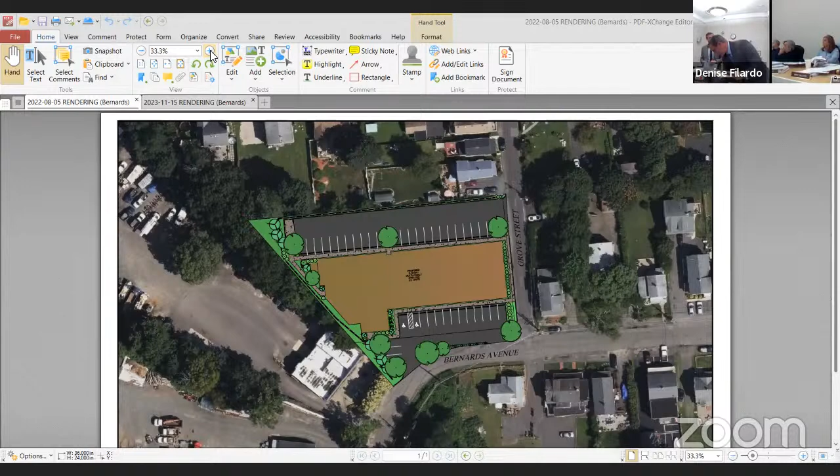There were some completeness waivers that were requested previously and granted by the board as part of the last application, and requested again as part of this application. The board planner's letter identifies nine checklist items that require waivers for completeness, mainly improvements beyond the current property line, such as grading, topography, and other improvements 300 or 500 feet beyond the property. We would agree to comply with those and provide final compliance plans. These are the same waivers granted during preliminary, and I don't believe waiving these items would impair the board's ability to review the application. We'll take that as the first stipulation; you'll see final compliance.

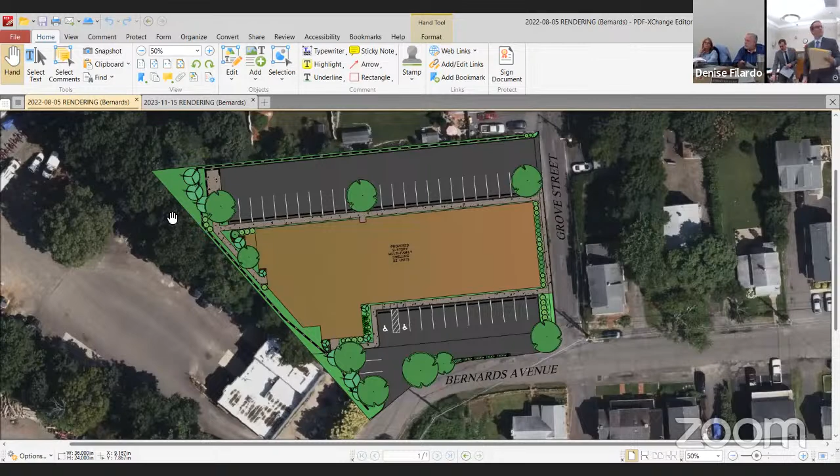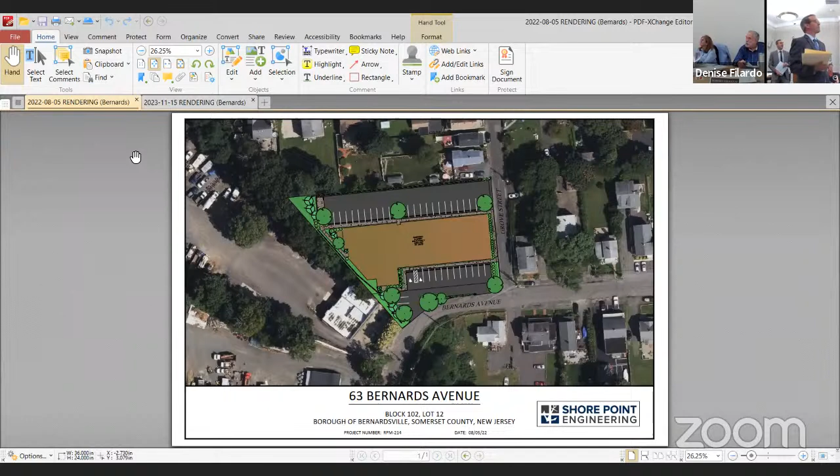Using Exhibit A1, the prior rendering of the site, let's orient the board on the location and surrounding area. The property is located at the northwest corner of Bernards Avenue, with Grove Street on plan going vertically in the northwest corner. It's approximately 0.82 acres and is presently developed with a 2-story multifamily residential structure, a detached parking garage, and a paved area. As mentioned, the applicant is proposing to construct 22, 100% affordable housing units here within a 2-story building.

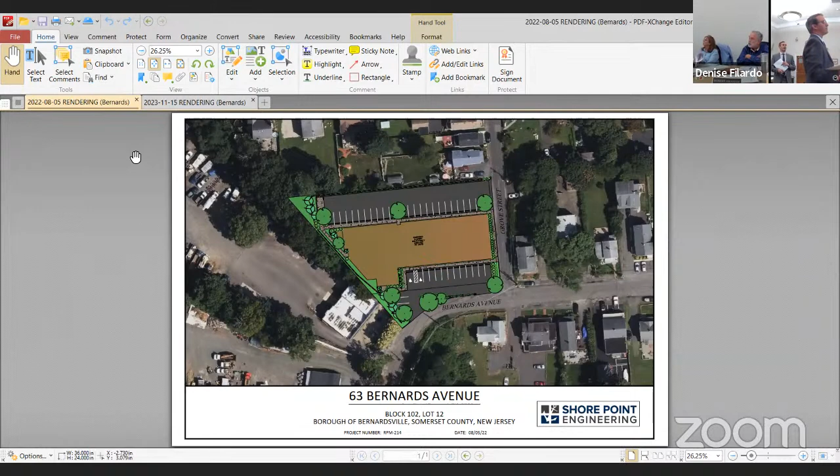During the preliminary hearing, we talked about some challenges on the property, particularly that there's a borough plan to realign and reconstruct Bernards Avenue along the bend here, which was not previously known to us when we did the design. The previous application showed a portion of the parking coming off Bernards Avenue with the remainder behind the building. Our testimony at the preliminary hearing was that we'd modify the plan to adjust the building's geometry, slide it towards Bernards Avenue, and relocate all parking behind the building with a single entrance off Grove Street.

I'm going to switch to exhibit A2 now, which zooms in on the proposed site conditions. I believe we've accomplished everything we told the board we would do at the preliminary hearing. The building has been slightly modified in geometry, but overall it's still a very similar size, with a minor reduction in floor plan square footage. The building was shifted towards Bernards Avenue, and all the parking is now located on a double-sided drive aisle behind the building.

Is that whole parking area kind of pitched downward? The site existing grades from the intersection of Bernards Avenue and Grove Street towards the back corner. In order to provide handicap accessibility to the building and units, the parking lot is essentially flattened in this area, which results in the need for a retaining wall along the northern property line and down the western and southwestern property lines, as discussed during the preliminary hearing.

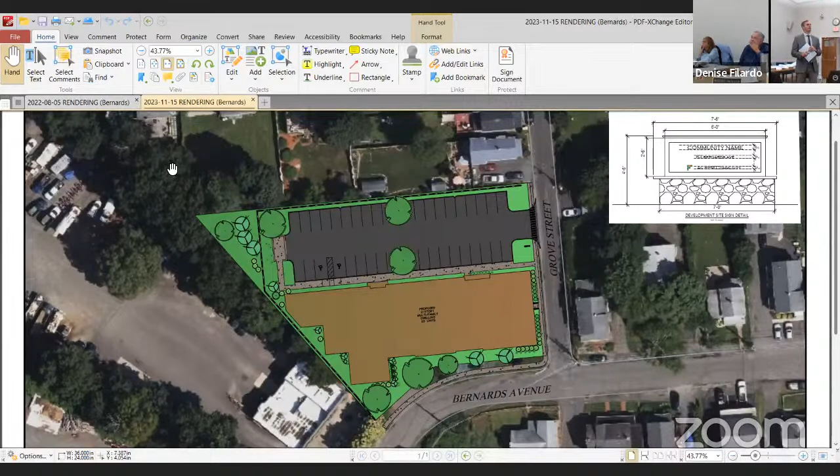The retaining wall along the northern side is about 10 feet in height, and along the westerly property line it's up to 15 feet at the highest point. The retaining wall is located there to create a flat site in order to construct an apartment building that is handicap accessible for all the units.

The retaining wall on the north side of the property, which the parking abuts, will have a guide rail for vehicle protection, as well as a safety fence atop for fall protection. It was originally envisioned as a 4-foot aluminum fence, but due to the location and only about 5 feet between the curb line and the property with a retaining wall, guide rail, and fence, we'd propose a solid 4-foot vinyl privacy fence. This will help shield any headlights from vehicles parking and facing the adjacent properties from headlight infringement.

Mr. Shelley: We're showing green along the back there. The plan is showing landscaping. We have about a 3-foot gap between the top of the wall and the back of the curb, which will have a guide rail with bumpers on it. There's not significant space to landscape, so it'll likely end up being stone rather than lawn, since someone would have to mow it back there and that's not practical. It was a condition of the board. I just want to point out that it's shown as green, which gives the impression landscaping is happening, but it's not reflected on the landscape plan. Thank you for the clarification. No problem, but it's not landscape—if not landscape, it would probably be a stone finish for maintenance.

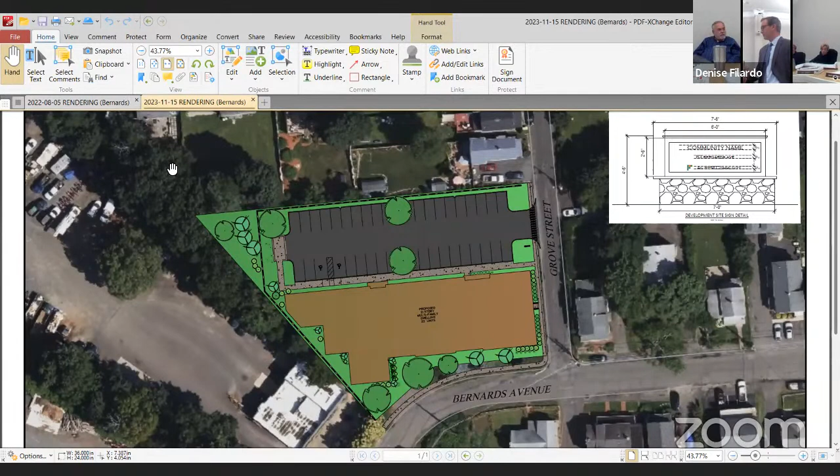Name and business address correctly: first name Aaron, last name Como, business is Inglese Architecture and Engineering. Address is 632 Conklin Ave, Cedar Grove, New Jersey.

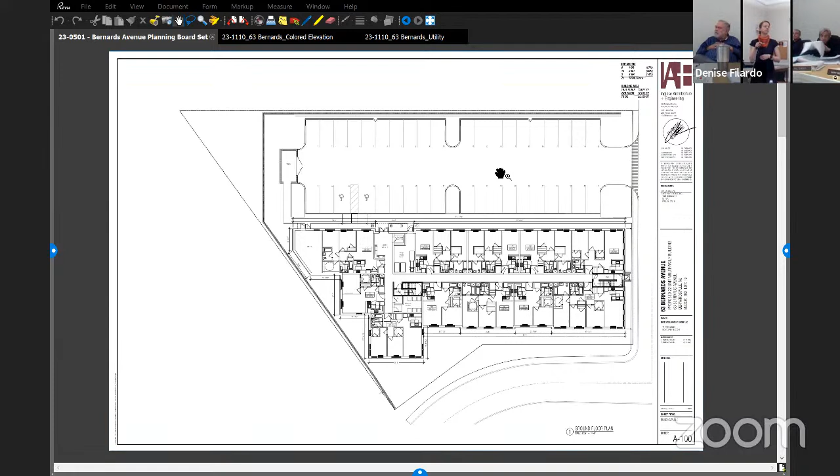I can keep going through these plans and then we can talk about the utility room.

So the bottom plan on sheet A100 is the second floor plan, showing units going around the perimeter of the building. There's a trash room and recycling room with a chute for recyclables and trash, and a common laundry room at the other side of the stair core. There's also a small outdoor terrace directly over the main entrance of the building.

The floor plan above is the roof plan. One of the stairs goes up to the roof for access for maintenance.

Now I'm going to pull up our first exhibit.

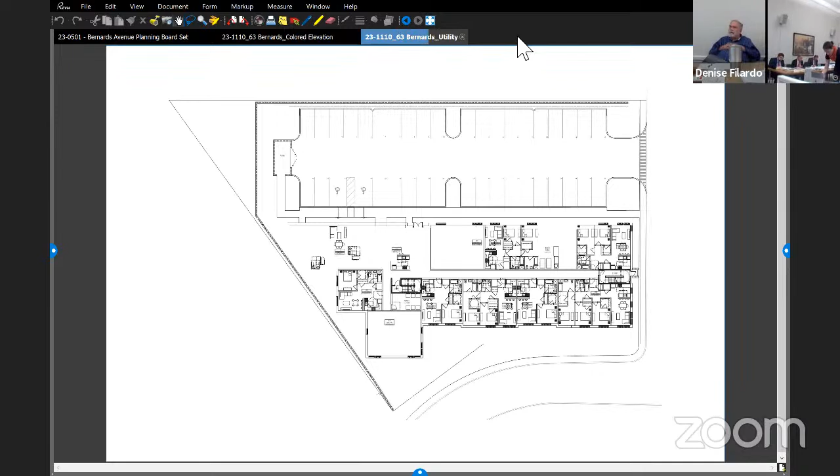Is there an elevator? No, there isn't. The second floor access is carried up through the stairs, for moving in and moving out.

So this is a new exhibit that wasn't submitted as part of the application. It would be A3, could you please identify that on a sheet? We can call this the alternate utility room plan, dated today, 11/16. What this plan shows is the updated location of the utility room that we're proposing, shown in red here, this front room. Let me zoom in because it's a little small.

So we're showing the electric room with the electric meters right here. There's going to be a canopy overhang at this recess to help shield the meters, as well as plantings in front of them, which this plan doesn't show. We need to allow 3 feet between the meters and whatever shrubs end up going there, which we do have the clearance for. Behind the electric room is the water utility room where the backflow preventer will be located, so we can avoid having to provide a hot box on the site.

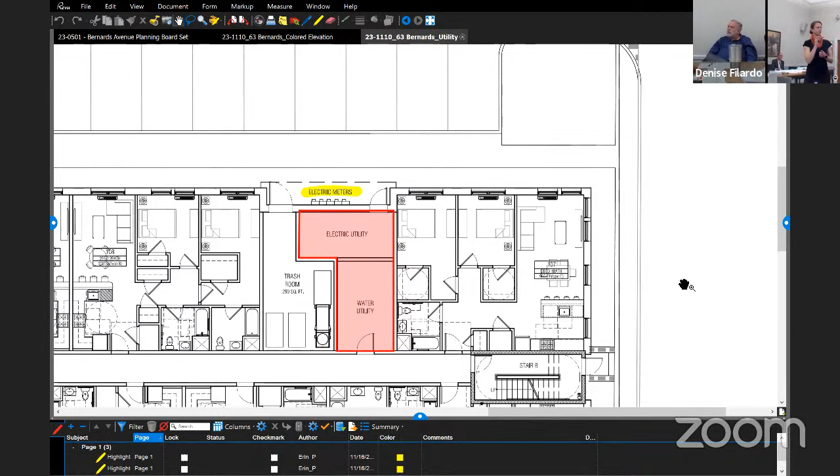So that would be instead of the utility room and the trash room on the original plan. Yes, correct, you don't have both. You don't have two, just one. We just had one, yeah, we relocated it.

And the next thing is the trash room, not next to the entrance, right, which is where you had it before? Right, yes, it's not actually at the entrance. This is the revised lobby, which is actually shifted over towards Grove Street, maybe by like 20 feet, but it's generally in the same location.

We have mailboxes and a package room. And here, where there previously was a utility room, is a residential unit. I'm sorry, what's there, another apartment? Apartment, yeah, with the gas meters located on the western wall here. Again, this is subject to the utility company's requests or desires, but this is where we would like to propose them.

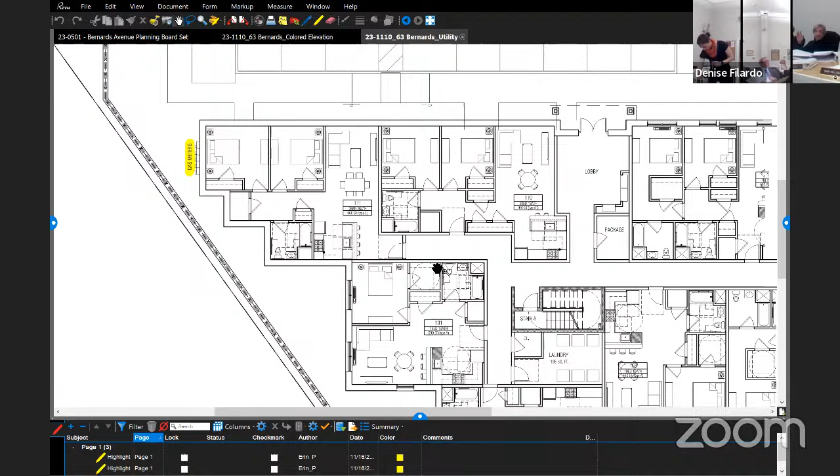Yes. Have you thought about putting the trash room more in the middle, so people don't have to haul it equally, east and west? Trash chute, right? This one is on the east side. You mean move it more like the west side, here? I think we could probably, so it just makes it easier, we could look and see if we can locate it equidistant.

Does the alternate plan maintain the trash chute at the second story level? Yes, same idea, there'd be two chutes, one for recycling and one for trash at the second floor. Trash goes into the trash room to the left of the entrance. Yes, and it goes into bins there? It goes into the compactor, which compacts it into a 2-yard dumpster that's on rollers.

And then that's got to get pushed all the way over, rolled out into the enclosure for pickup. So yes, if we were able to shift it over equidistant, it would be a little closer to that. So the cars are all parked there, how do you get it out into the driveway? You go outside, I guess. Yeah, you go down the sidewalk here into the side entry of the enclosure.

Well, before, the trash room used to be where the entrance is. So it was closer to the dumpster, or whatever that area.

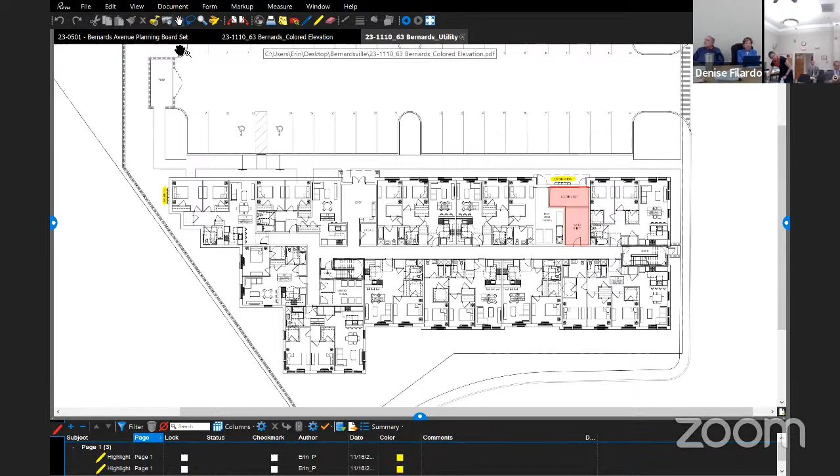I'm going to pull up the second exhibit we have, which is a few colored elevations. This is called colored elevation with today's date, 11/16/23. Exhibit A4, colored elevation, dated today.

The material palette is generally the same as what we proposed in the previous iteration. What you're seeing here is the elevation that fronts Bernards Ave. We're proposing a mix of stone veneer, fiber cement siding, metal standing seam roof, and a variety of colors that complement each other. Up top here we're showing the east elevation, this is the doorway out of the egress stair onto Grove Street, and then the west elevation.

This is what was submitted as part of the application. What you see here in this gray area was the previous location of the utility room, which was a one-story portion of the building. In the updated design, this would be a two-story portion, with units on top of each other there. So we would end up eliminating this little railing detail that we have at that second floor.

So the dormers are just decorative, right? Dormers are just decorative, that's correct. Why is the roof height so substantial? With the mechanical behind there, isn't it? Yeah, it's the roof height. This is kind of like a fake roof. Looks real from the street, but behind it there's a parapet wall and a flat roof for hiding mechanical systems.

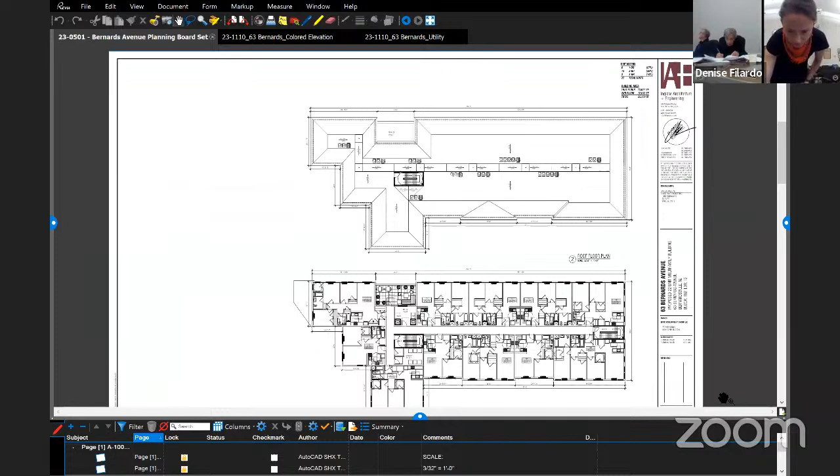To the left of the main entrance, we're proposing just a building mounted sign to correspond to the monument sign. We don't have a building name yet, but we're gonna propose aluminum lettering with 1-inch standoffs mounted onto the aluminum back panel, and the colors would coordinate with the material palette of the building. There were no notes on the elevation, so I wanted to put that on the record as well.

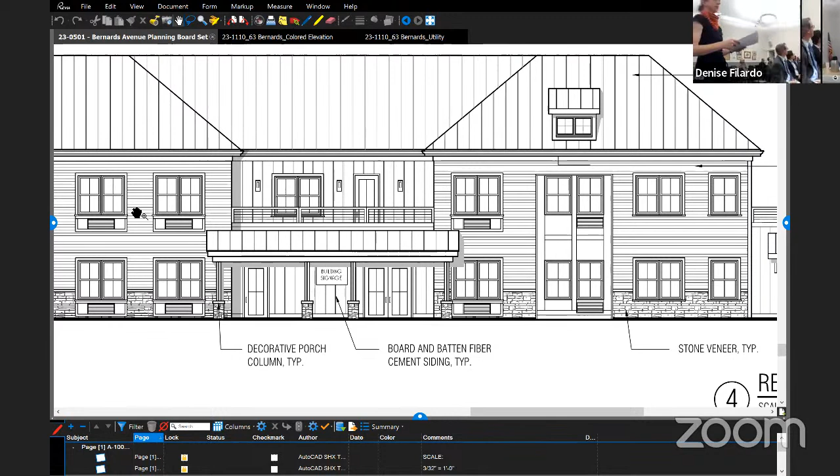Confused by the shadow boxes here. Maybe it's just my eye, but the right panel only has shadow boxes on certain windows. If you go left to right, left 1, 2, 3, the shadow boxes are there, not shadow boxes under here. We can add the trim detail there. No, I'm talking about the gray — I'm assuming that's the painted shadow box? Oh, that thing, that's a vent. But to keep the look consistent, we can add the trim detail, it just wouldn't have the vent.

Anyone who had access to that room area — is the door locked on the second floor, so only... No, that would be an amenity for the tenants, so everyone could have access to it. And what is the proposal for the use of the room?

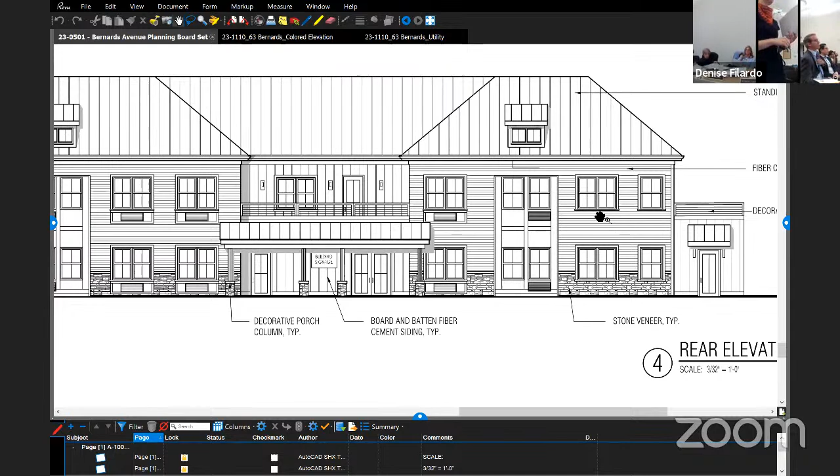There's a small one over the door. No, I'm asking about the roof, not the second floor. Oh, I'm sorry, that'll be locked, that's only for maintenance. I thought you were talking about... And it's accessible from the stairwells? I guess, yes, they're not gonna pull a ladder down. There's one stair here that goes all the way up to the roof for maintenance access.

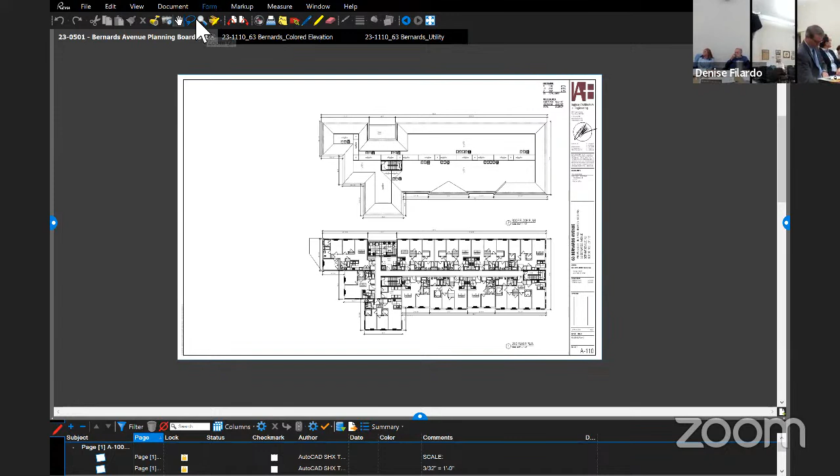My other question is just to get your comment on the HPC suggestion that you vary the siding colors for sections of the building. Let me pull up the comment. I was slightly confused about it. In my opinion, the elevations shown here do vary the colors, but maybe historic was talking about changing the colors we have — we'd be open to that. Yeah, to clarify, yeah.

So you also said the roofs would be ready for solar panels, not have solar panels on it, but would be wired, so the solar panels could be installed at a later date. I don't think we said that, unless... No, I remember the conversation. But it may not have been this one — I think it was my other application, next to the firehouse, the one rented to the firehouse. That one was solar ready, or could withstand solar, but solar wasn't proposed. I don't know with respect to this one, if it's designed to withstand solar.

We talked about it and it wasn't cost effective, given that this is... Right, yeah.

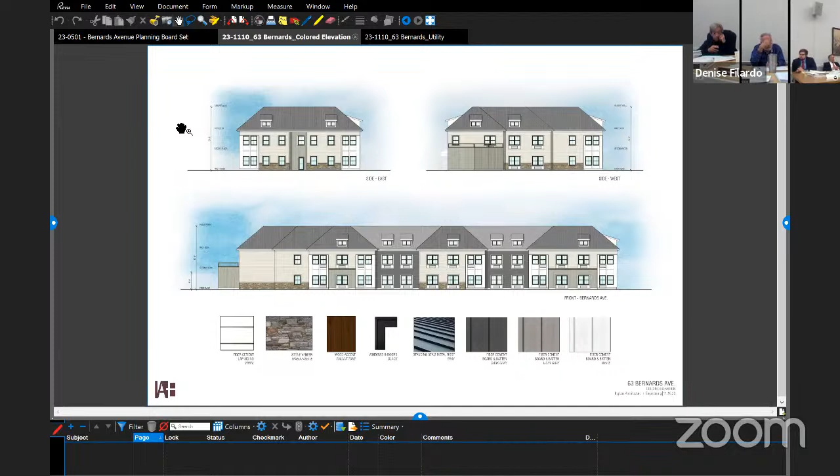What if you allotted a certain amount of time to each application? You want to put three on for that night? But then you may not finish. Yeah, may not finish all of them.

What's your preference? I think there are kind of two tracks we'll be discussing. One, I'd suggest we've already noticed Brook for November 30th, so we'll know Monday, or Tuesday morning, whether this other application is proceeding or not. If it's proceeding and it doesn't look like it's going to happen, we'd just ask on the 30th that the board accept jurisdiction and carry it to the 14th, which you already identified. Mount Airy would be on for the 14th as well, to give professionals time to go through it all and work out the survey and the resolution.

This matter could be carried to the 14th as well, and it would be the first thing we address. So why don't we just carry this to the 14th, leave whatever's noticed for the 30th, and see what happens with 114 Claremont on that night. Otherwise it'll give a longer time to work through the rest. Yeah, I think about a month from today is a good amount of time.

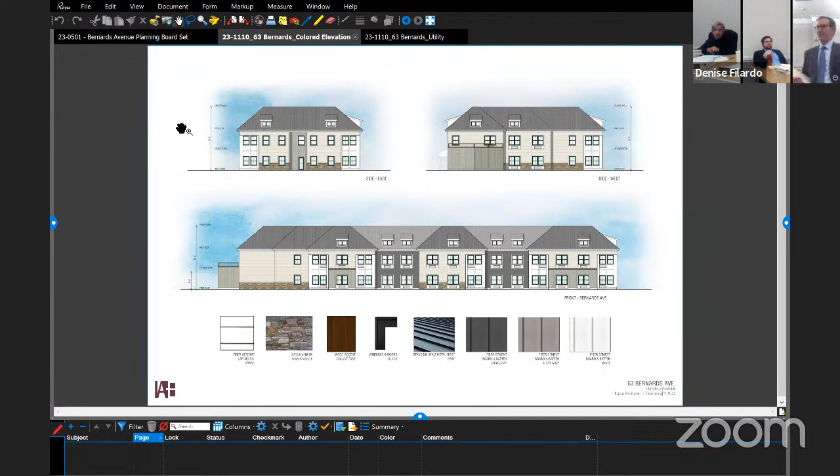Okay, so we'll continue this application to the 14th, 7:30, same time, same place. Further notice required? Do we need an extension? If one's needed, you just send me the form, or I'll send a letter, that's fine. Thank you, all right, thank you very much.